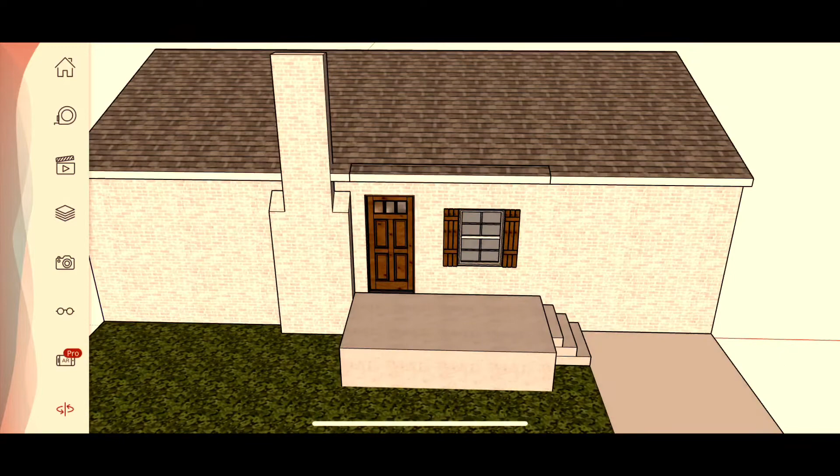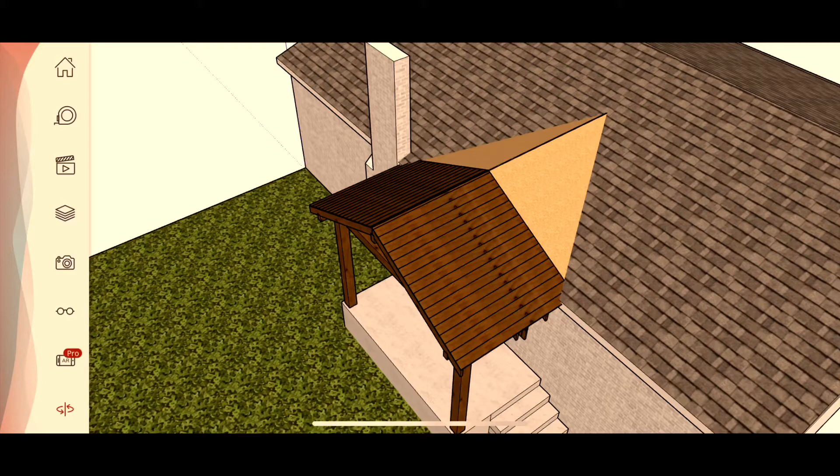All right, so this is the project. I did a basic SketchUp model here to show what we're going to be doing. This is great for the client to visualize what you've actually got in your mind, and it's agreeable. It also helps you eliminate any kind of constructability issues ahead of time, because you're able to piece it all together virtually before building it. So this is what we're going to be tackling.

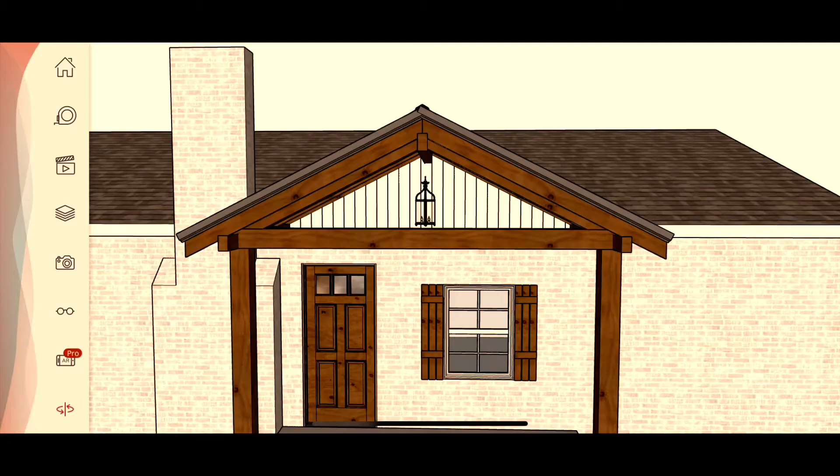On our way to the job site. Potter's right behind me. Today we are going to be tackling the rafters and the timber framing. It's going to be a good day. Let's get it.

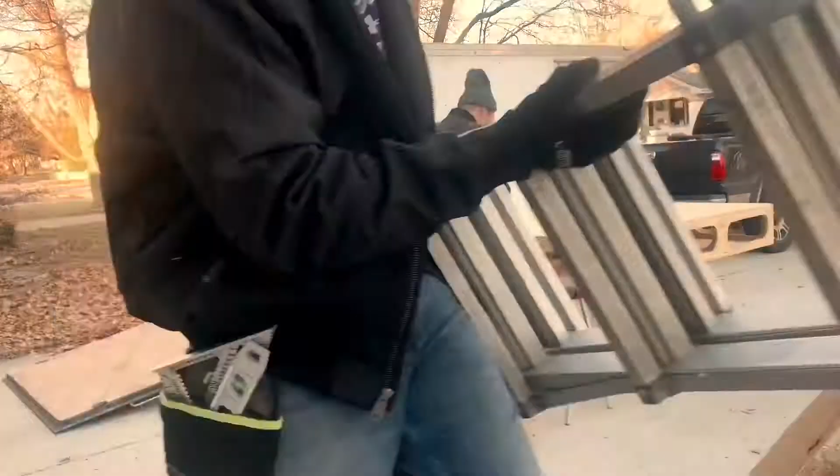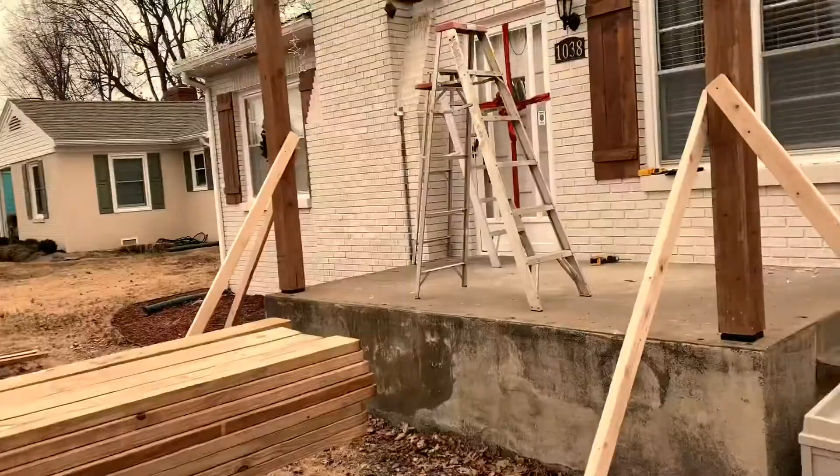Got all of our stuff set. All our timbers are set for the frame. Coming back from lunch, we'll be setting the rafters. Boom. What we're trying to figure out right now is how to match the pitch of our addition to the pitch of that roof, which makes a nice, clean, very even looking valley.

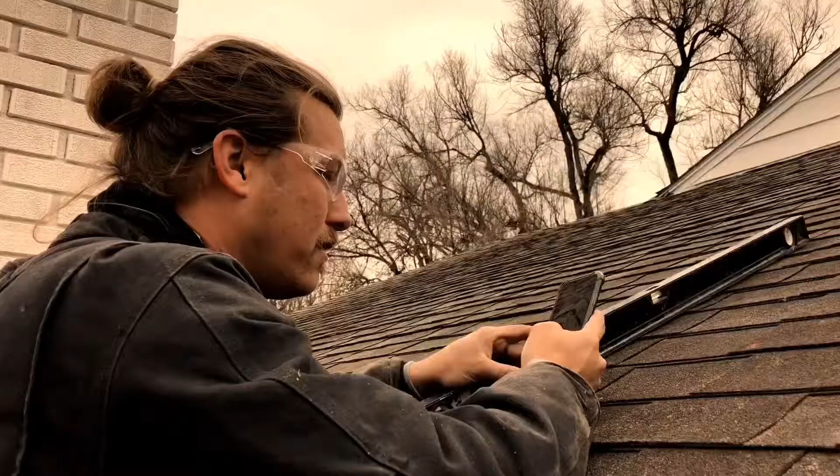An app called Pitch Factor. You can find it in the App Store. There's probably other ones like it. But what it does is allow you to find the pitch from your iPhone. Is this exact? I don't know, but it's exact enough for what we're doing, because we are creating a new pitch for this roof, and we wanted to get as close as we can to this so it looks as nice as possible. So setting your level, hitting all the high points of each shingle.

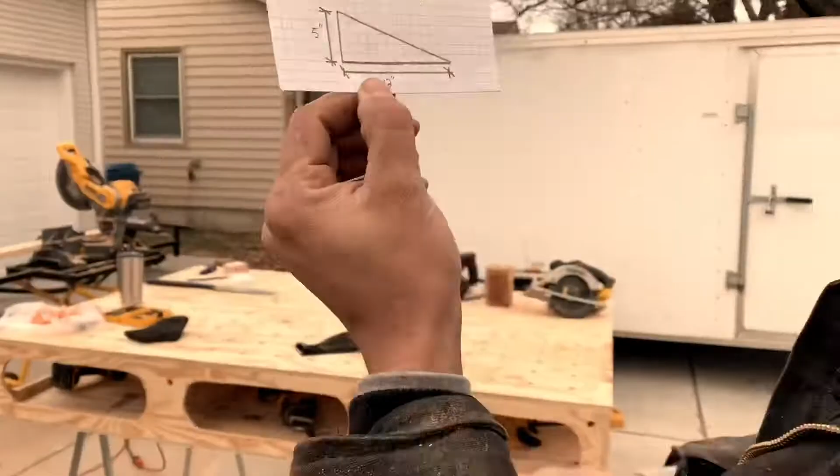Go. So we're going with a 5/12 pitch, which is 5 inches of rise over 12 inches. Handed in a note card. If you remember, a squared plus b squared equals c squared. What we're doing here is getting this pitch on the roof. It even kind of matches the other pitch, so it'll make everything look very nice. A squared plus b squared equals c squared.

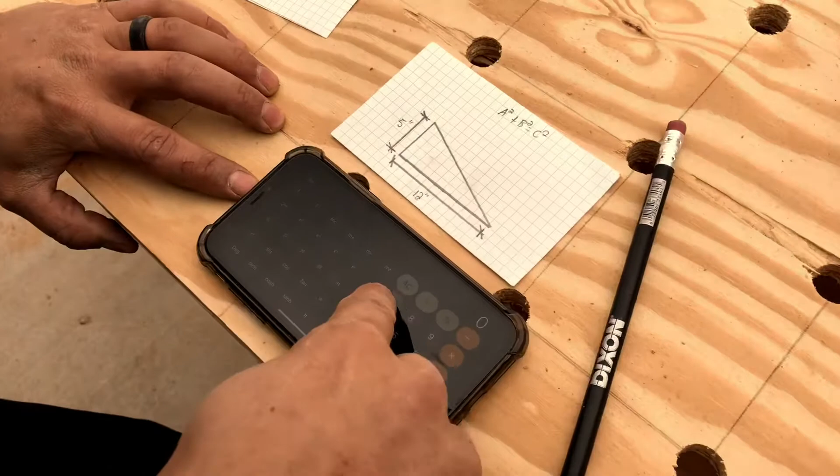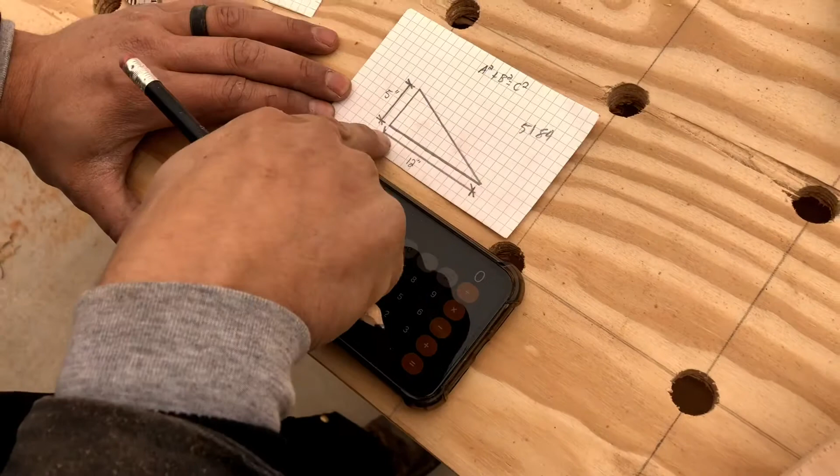So 72, which is the length of our overall center from the outside of the timbers to the center of the timber. And we're going to square that. So if you turn your calculator sideways, you can square it. You're going to write that down. And then you're going to take 5 times 6, which is our overall length. So 5 times 6 is 30. And then you're going to square that. It's got 900. Then add in the 5184 and take the square root of that.

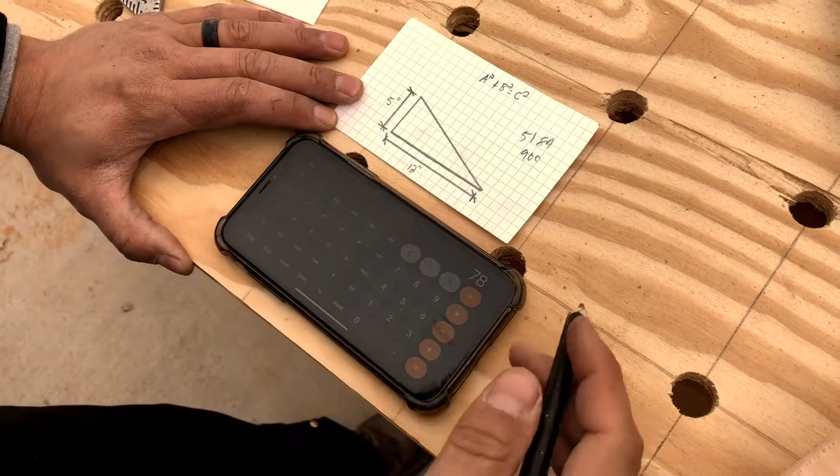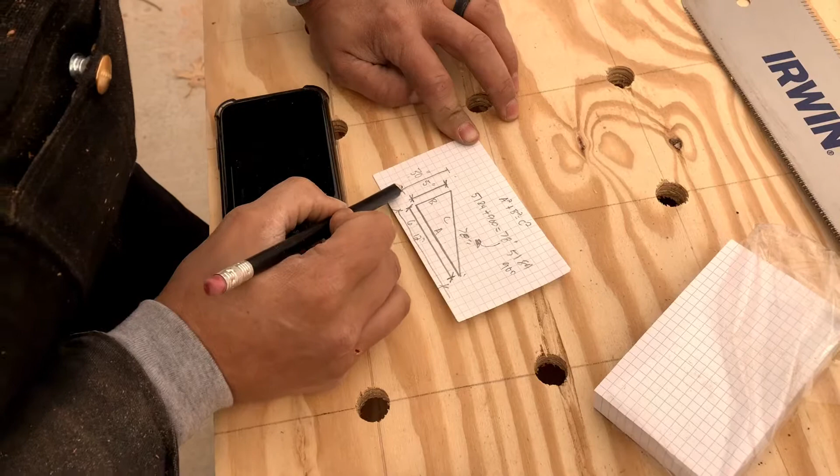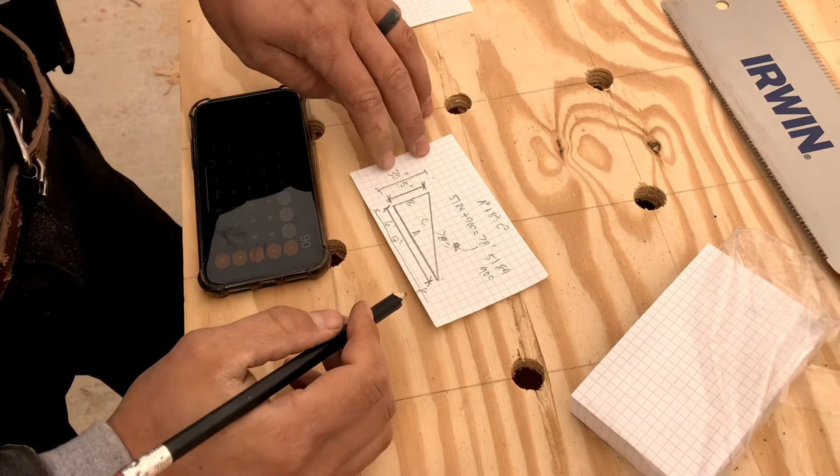78. We know that the overall length of our rafter from tip to tip is going to be 78 inches. Now, in order to figure out what our overall height needs to be for the top of that rafter, we take the 5 inches times 6 feet, which is 6 times 5, which gives us 30 inches from the bottom to the top. We have to account for our ridge board that's going to be going down the middle, in our case a 4x4, just for aesthetic looks, and we'll be placing that next.

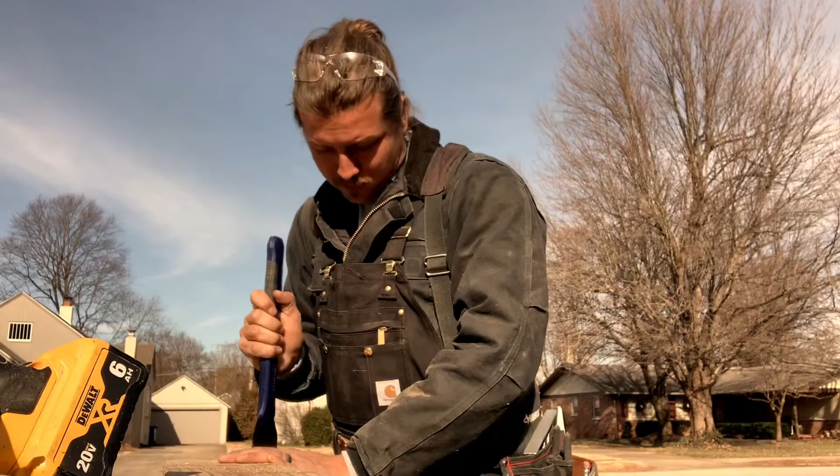And so there you have it, the framed porch addition. All our timbers are up, all of our rafters are up. We'll be putting decking on tomorrow.

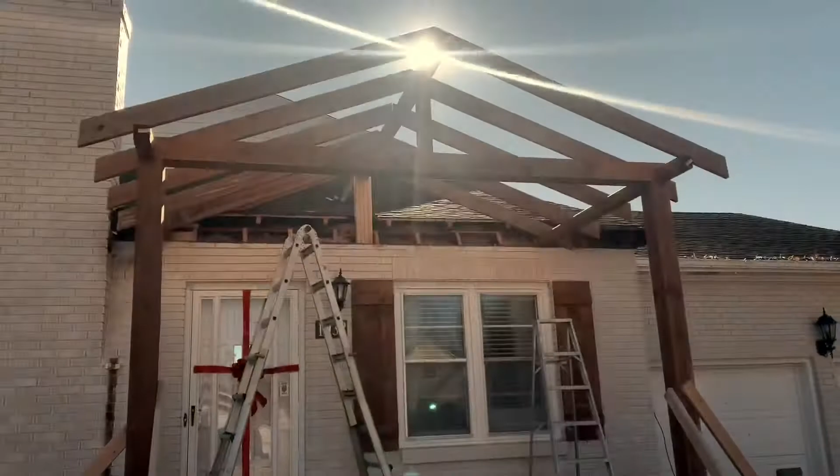What's up, guys? So the reason I'm routering every one of these boards that we're using as our decking is we decided to go with the cedar tone pre-treated wood, and they do not make that in tongue and groove, or at least not readily available.

So I purchased this guy just recently. This is the first time I'm using it. It's the brushless compact router from DeWalt. It's working out really great. It's got a lot of power, definitely enough power for what I'm doing anyway. And yeah, so we'll be putting these on shortly.

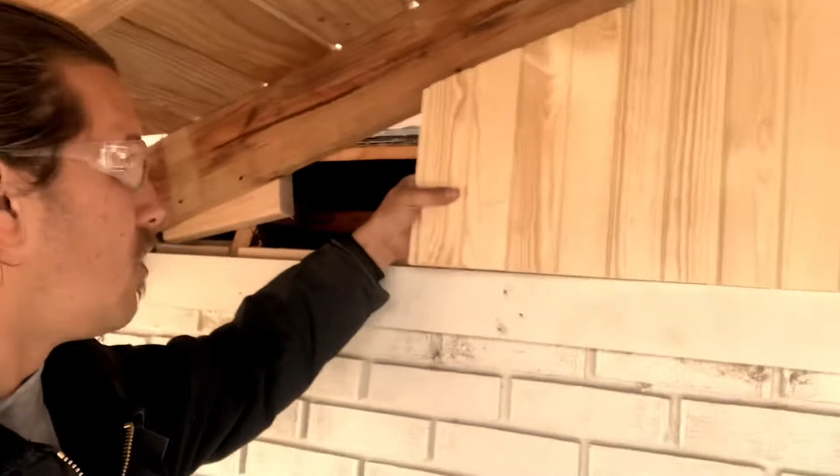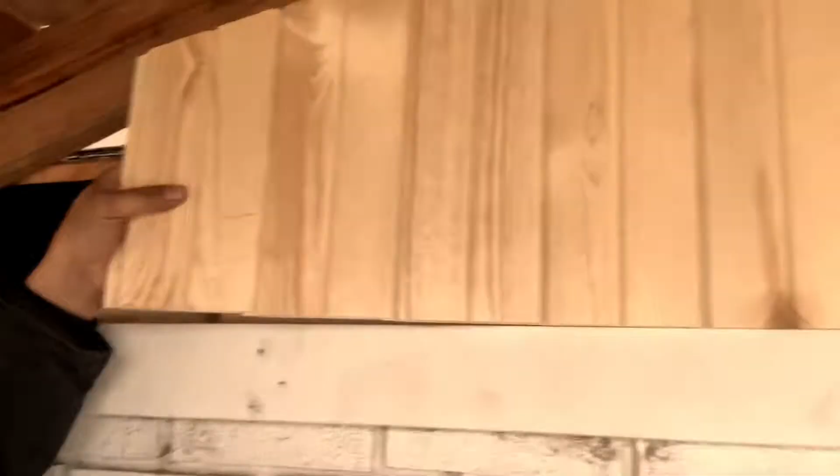We're here installing the tongue and groove on the porch addition. One of the hard things about installing tongue and groove is getting these boards really tight and being able to fit them in there, because you have to go back on that angle and it can't fit. So one way is to keep all your boards loose and put them in as you go, and then tighten them back up, leaving 3 loose to put the next board on.

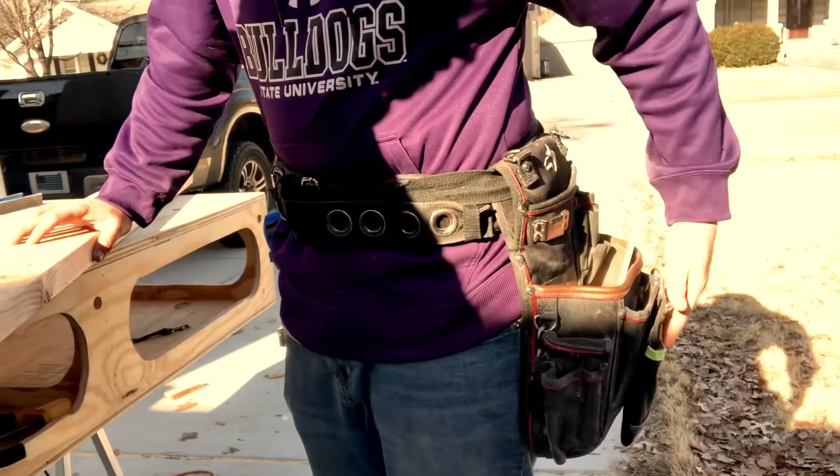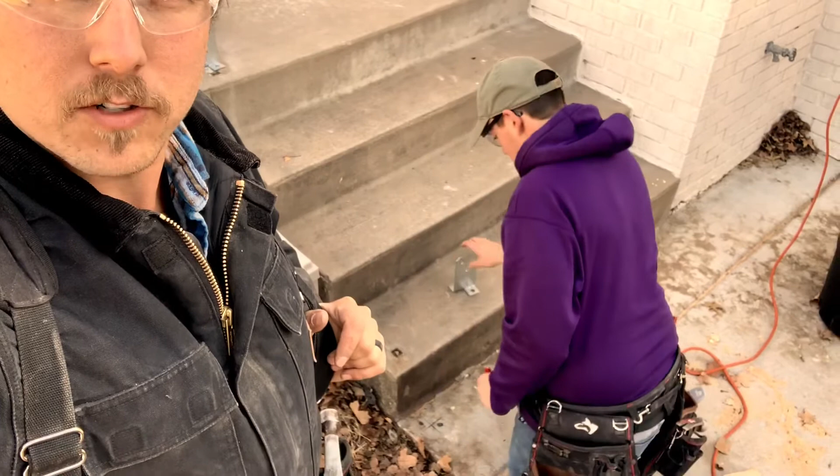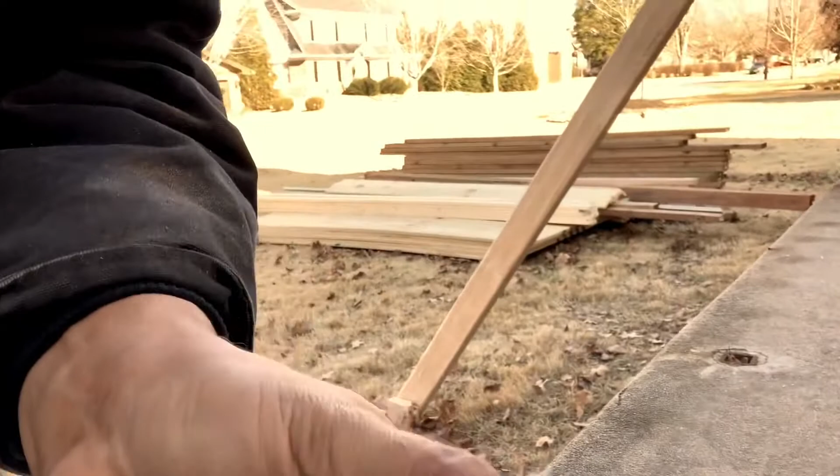So we are installing the Simpson Strong-Tie concealed post base. Potter is marking the holes right now where we will use the hammer drill to bore out the holes, just like we've done on these over here. Bore out the holes, vacuum them out, and then you come and anchor them down, and then this post base goes right here, which keeps the 4x4 or 6x6 off of the concrete.

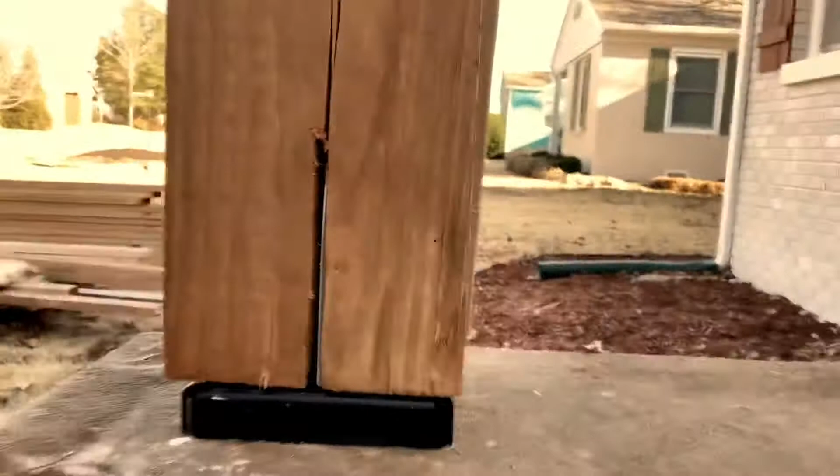And then when you're prepping your base for installation, you just drill or cut a slit where the concealed post base can fit up in there, and then use the pins that come with it and drive those in.